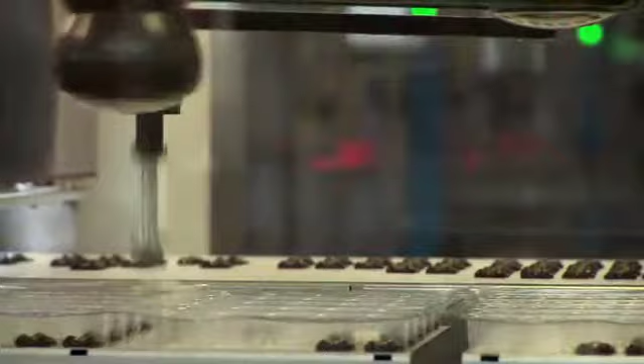I'm Gerhard Schubert, the owner of Gerhard Schubert. We are located in Packaging Valley in Germany, where the best packaging builders in the world live.

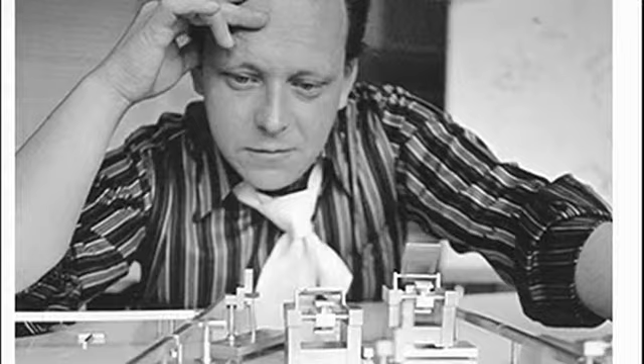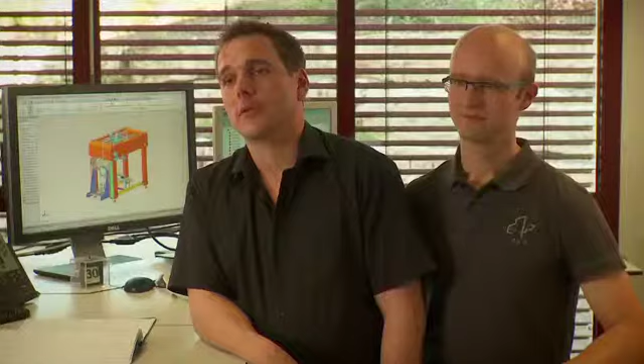The story starts in 1959. I was 22 years old at this time, and I worked in a design office. I had a lot of ideas to build packaging machines in another way. Schubert is so unique because he was the first one who solved packaging tasks with robots.

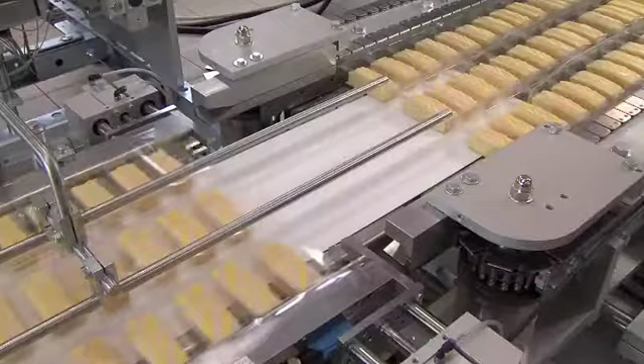We can build machines for packing chocolate bars, packing bottles. We even built machines for packaging underwear. The latest thing was a filling machine. We can fill tubes.

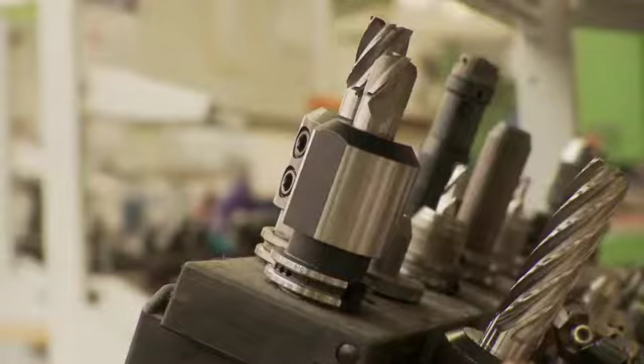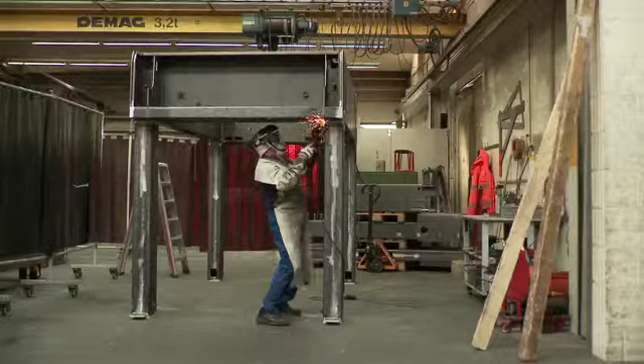The Schubert machines are built from standard components. The machines we build are built specially for the customer. That means we don't have the machine on stock. You get a problem and you have to solve the problem.

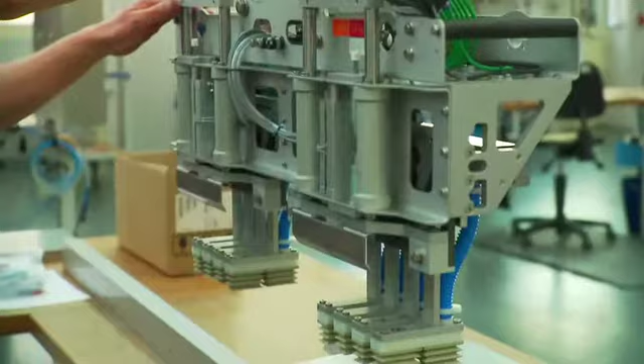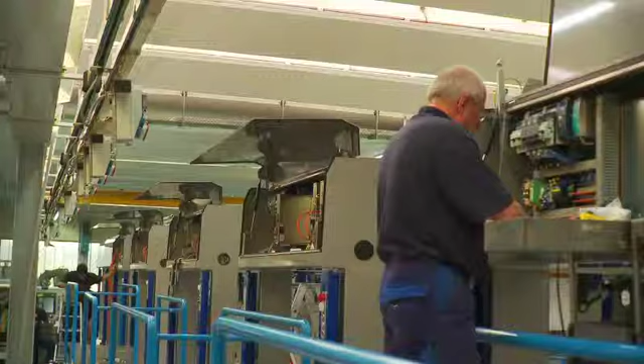I always was thinking, how can I build a packaging machine with high flexibility? And then I got the idea that high flexibility can be made if you have simple mechanical parts, intelligent electronic controls, and customized parts, which are the tools exactly built to the product. And that is possible with SolidWorks.

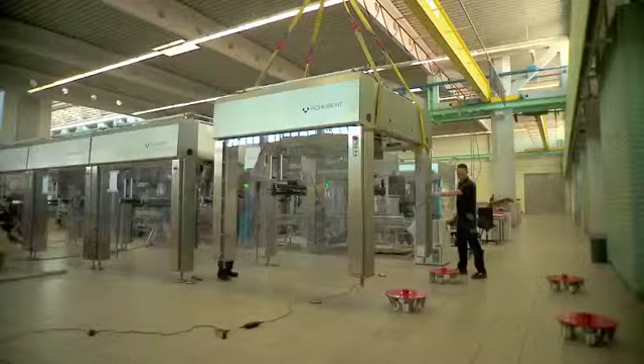Schubert designs packaging machines by using 7 standard components, for example our frame or the F2 loading robot. That's what makes us unique.

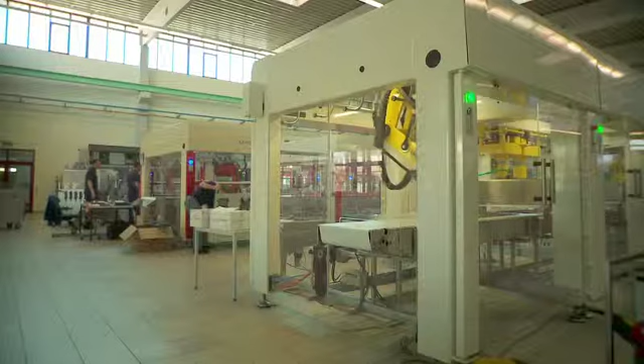We are using SolidWorks because it's intuitive to handle. You can build assemblies from 2 parts up to more than 10,000 parts. And it's very important to handle such big assemblies because we have to look over the whole assembly at once. We have up to 95% of all parts that are in the machine on our computers.

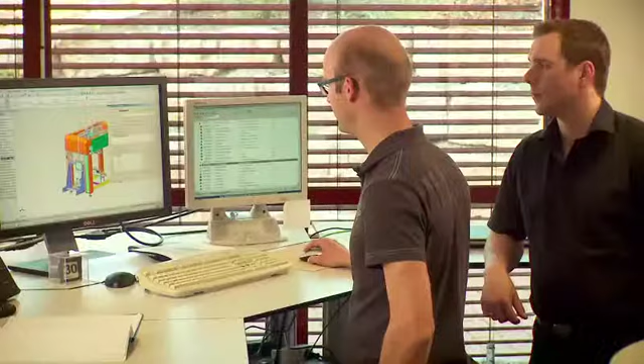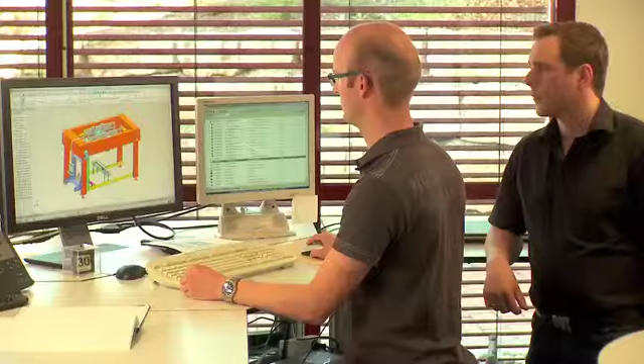The configurations of SolidWorks help us a lot. It's a small frame and we can easily switch it over to another size. Now you can see the carrier systems are a little bit too small. Now we can look at the robot. It needs a bigger carrier, another size, and now it's fixed.

The tools we design depend on the product we have to pack. SolidWorks helps us display how close the robots come together, so I can move the robots in the machine. I can simulate step by step how the machine has to work.

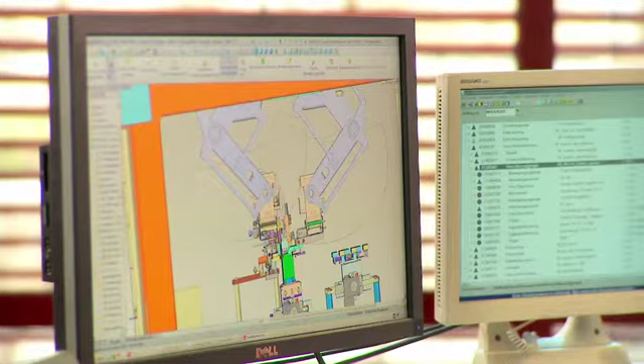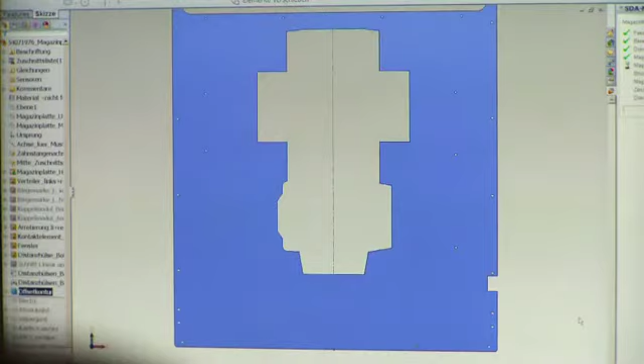Usually we have to build a machine in less than 6 weeks, and because of this it's very important for us that we can do our work very quickly. SolidWorks API functionality gives us the ability to have programs which design these assemblies all by themselves, automatically. So you can imagine we have to build a lot of these assemblies. This saves us up to 5 hours each assembly, and it's all running by itself.

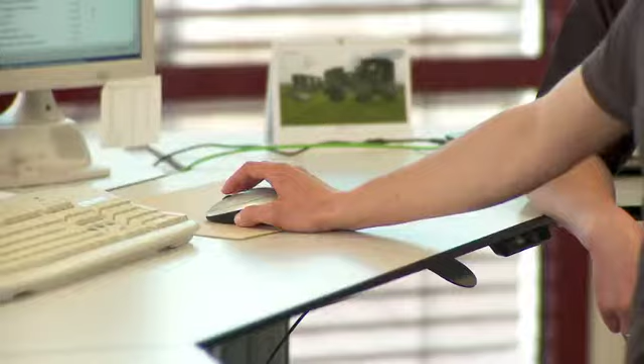We like to solve problems. If you have ideas in your head, you need a tool to bring the ideas to paper. I was the first employee in my company who worked with SolidWorks.

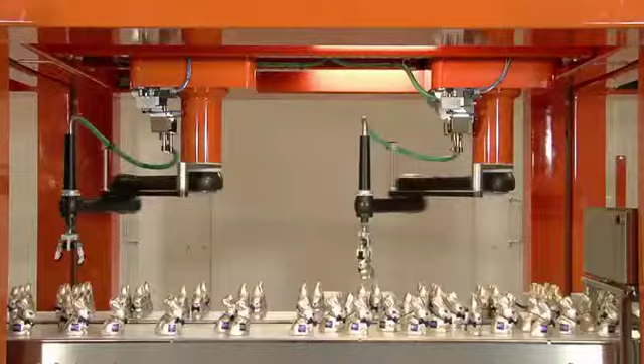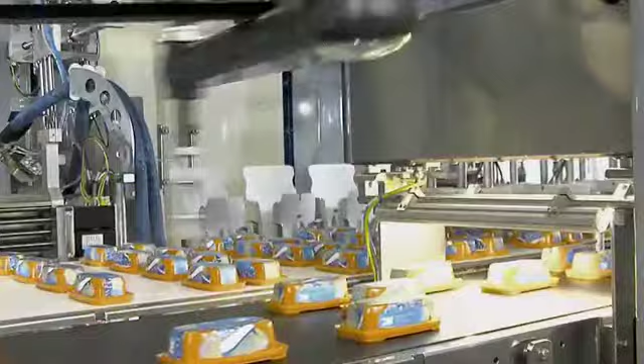Normally, I think a product changes in 3 or 4 years. And if the product changes, normally you have to change the packaging machine. If you have a Schubert machine, you just change the toolings to the new product. You can still use the old packaging machine. Schubert packaging machines normally have a lifetime of 40 years. For me, that's beautiful.